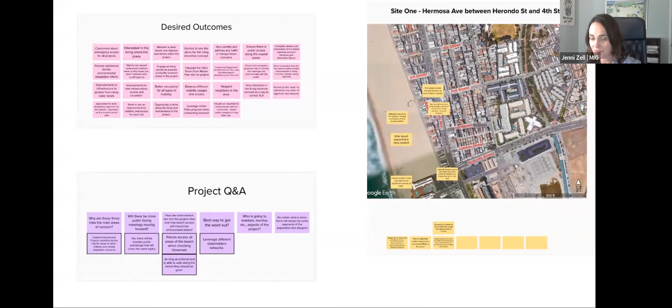So we have had 2 community workshops so far. We've had 6 official stakeholder meetings, and we've also spoken with some of you in person out on site. You have a beautiful beach at Hermosa. It's been actually a fun project too, just to get to walk and check out your place.

And this is some of the feedback we've received in some of our different meetings. It's pretty detailed. And also, in addition to getting your feedback, we have analyzed data, we have modeled hydrology, hydraulics, we have Moffatt & Nichol, coastal engineers who are on our team as well. And we also have CRC, coastal restoration consultants that are biologists, ecologists. We've got myself, I'm a landscape architect. We have civil engineers. We've got a great team looking at this from a lot of different angles.

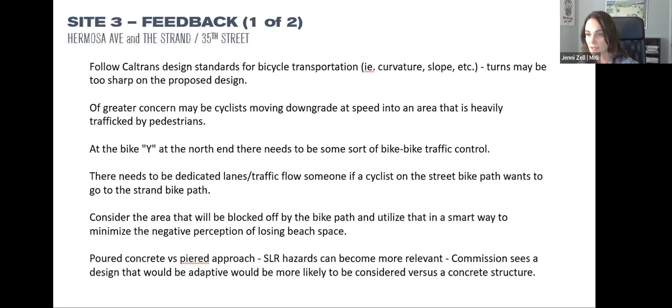And so we've looked at current conditions, projected sea level rise scenarios. We've calculated areas, and like Andy was saying, we've made renderings and graphics to kind of represent some ideas here that we'll be looking at. And so we've heard and recorded a lot of your preferences for proposed design options, your concerns, your desired outcomes, and your priorities for people who live within the community, and that any of these eventual changes or improvements will eventually impact you.

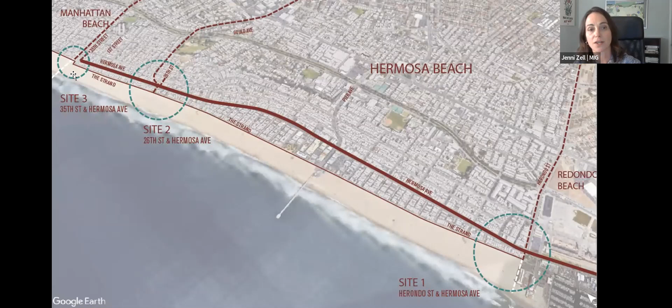For some of you this might be a repeat, but I want to remind us where we've been. This project is a conceptual design for a suite of green infrastructure projects and sea level rise resiliency improvements, to be incorporated into planning and mobility enhancements along Hermosa and the Strand at three locations: Herondo and Hermosa to 4th Street, 26th, and 35th at Hermosa Avenue.

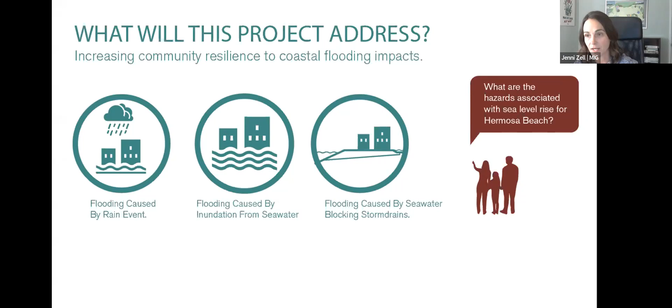These are the project's overarching goals. In previous public meetings, which are available on the city website, we walked through what the hazards are associated with climate change and how that's relevant to us here in Hermosa Beach. We dug into that a lot deeper in public meeting number 1.

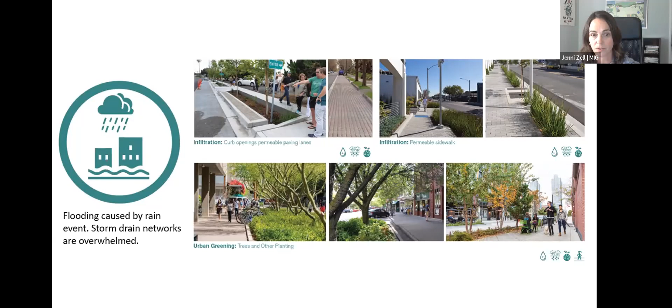We also looked at potential flooding measures for flood inundation caused by rain events when the storm drain gets backed up, and what we can do to address that. What about flooding from seawater driven by storm events? We'll look at that more in depth later. And other options caused by seawater blocking the storm drains.

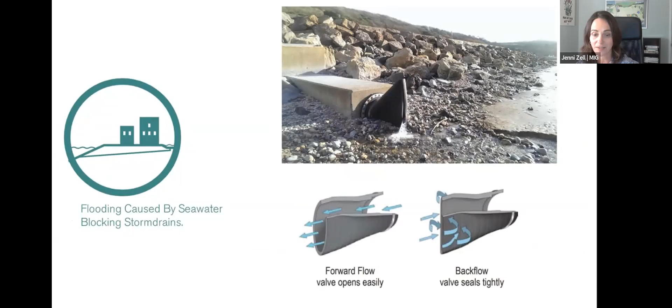Some of these solutions are technical and some of them are biological and a little more natural. This is representative of some of that study and what we're looking at.

What we've modeled is the Coastal Storm Modeling System, CoSMoS version 3.0, phase 2. It's a great online tool developed by USGS. We've also looked at Mike Urban and Mike Flood, which separately give flood determinations for node floods. We can get more into that in the reports later if you're interested.

We looked at various scenarios based on existing conditions: 3.3 feet of sea level rise, 6.7, even 16.4. What I want to note, which is really key, is that even the 6.7 foot of sea level rise is not imminent—there's a 1 in 200 chance of this happening by 2100. So that's just a reference point, but that's the scope of this project, to look at these different scenarios.

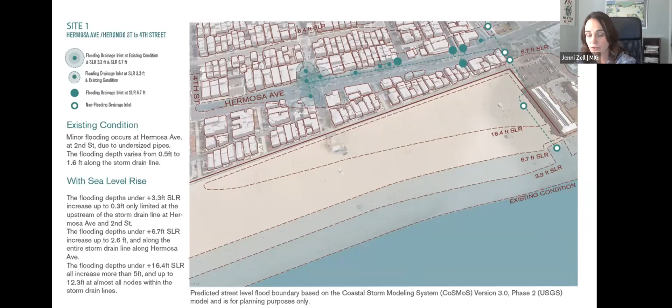Really, this site, site 1, is the poorest draining area of the study, and sea level rise compounds the flooding issues in this area. What this tool helps us do is look out long term and figure out how to combine infrastructure improvements with resiliency here.

We've explored two options so far. We're calling these options, but there's many deviations or iterations that can happen. We heard back from the community that we really need to show an option that keeps traffic and street flow as it is today while still addressing the flood concerns for this area. This is along Hermosa Avenue.

It's from Herondo to 4th Street. This option keeps the existing sidewalks and the two lanes of north and southbound traffic in place, and adds stormwater management in locations where we found opportunities—biofiltration planters located in existing parkways where there's no drive apron. We also found areas for new permeable paving and parking spaces that can add stormwater value in bioretention, to add to the bioretention filters.

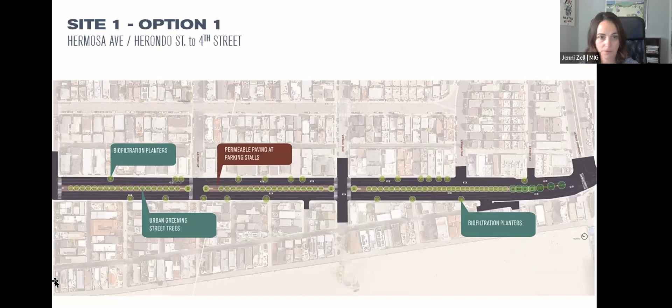This is what it looks like enlarged, one section of it. In the entire area, this option gives us a little over 2,000 square feet of bioretention planting, plus 23,000 square feet of permeable paving, and could add 98 new street trees.

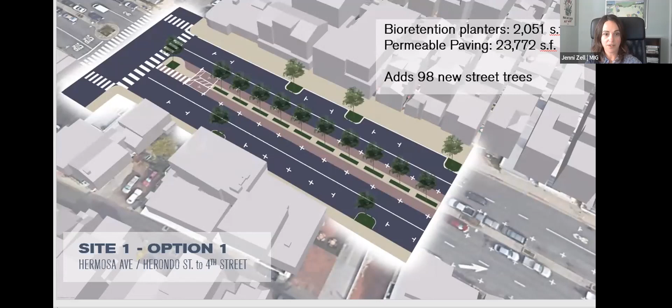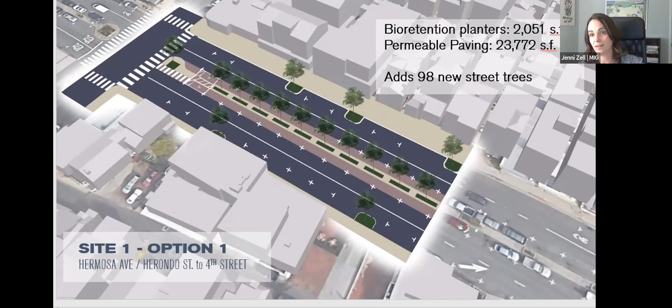To give a reference point: at a 10-year model, which is what we modeled for the storm drain, that gives us a flooding volume of about 42,000 gallons. The good news is that even with this lighter touch, keeping the street in place, just the bioretention planters get us about half of what we need to absorb that volume for the 10-year storm. When we add permeable pavers, we're right at that volume calculation for the 10-year storm.

Let me go back, give me a second.

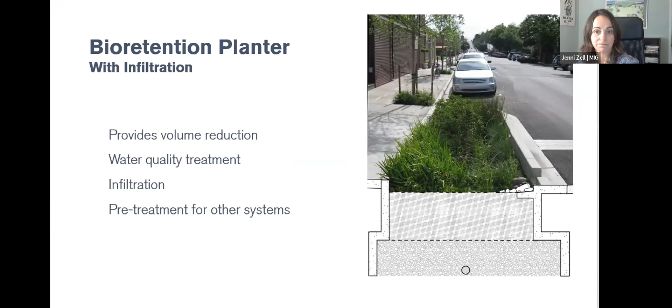So what those biofiltration planters look like, they're going to look something like this. I'm sure you've seen them on streets all around in different communities.

The other option, permeable paving. This provides volume reduction and infiltration. It has some constraints: they've got to be located 10 feet from buildings, and the volume reduction is limited.

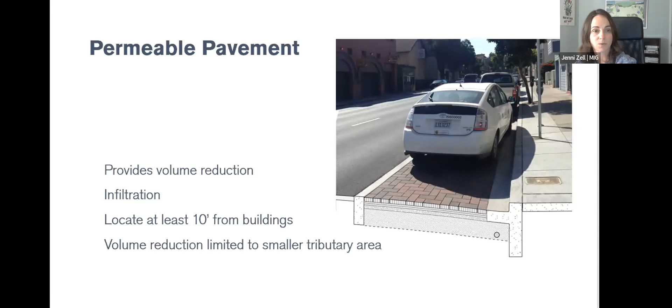These can be combined with other options like tree canopies, which we showed, to help just reduce overall stormwater volumes. So this option, option 2, really addresses mobility concerns and combines that with increasing storm volume capacity reduction.

Tying back to the goals of increasing mobility, this option adds a two-way divided bikeway connecting Redondo north up to Manhattan Beach. It increases pedestrian safety by reducing crossing lengths, and it also has angled parking.

We know that got pretty controversial in our last meeting. Some people love it, some people hate it. But what that does is it keeps the existing parking counts, which is so important to keep people and their parking and access to the beach and to local businesses.

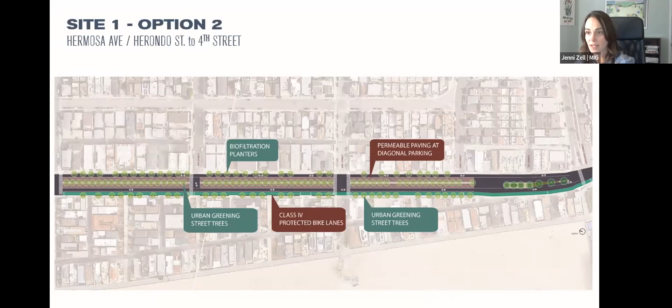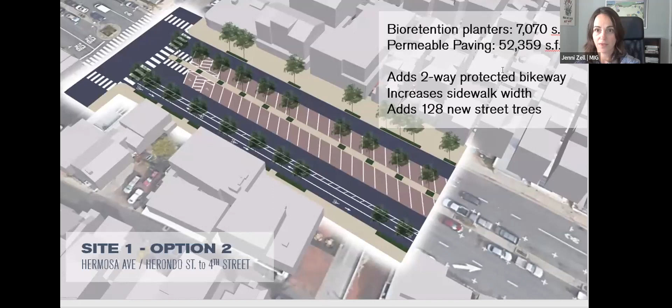And it increases the flooding mitigation for those increased levels of storm flood, like a combination of sea level rise and increased storm volumes. So those numbers are of course larger. This is about 3.5 times the volume in the bioretention planter compared to the previous option, and about 2 times the volume in the permeable paving.

The other added benefits here, and this is something we heard from the community, is ADA accessibility and improved sidewalks. So this adds a 10-foot sidewalk and other environmental benefits with trees and some vegetation to add water quality benefits as well.

All right, Andy. Okay, thank you, Jenni. So this is a point we want to pause and respond to, hear your thoughts and considerations that, again, with these being concepts, these are kind of options for this site. What else would you suggest are additional considerations or concerns or benefits that you see from these options might offer the community? Happy to answer any further questions.

I see a couple questions in the chat related to this, so Jenni, we'll need your help here. First of all, will the ground be able to absorb all that water during a storm, or will it be saturated given a high water table? Maybe you could briefly say between those two options as examples how much they relatively absorb depending upon the storm event.

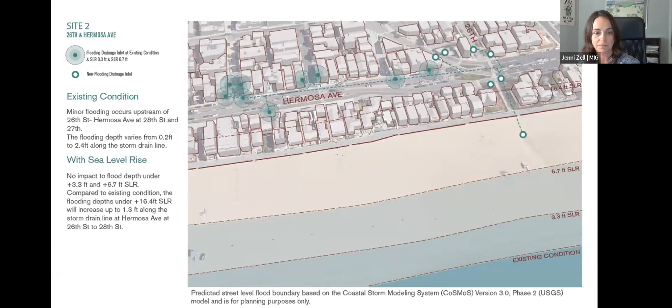In addition to biofiltration and permeable pavers, other options for 26 include bioretention basins. They take up more space than we have at the Herondo 4th section, site 1, and they provide volume reduction, water quality treatment, infiltration, and extra habitat and environmental quality benefits.

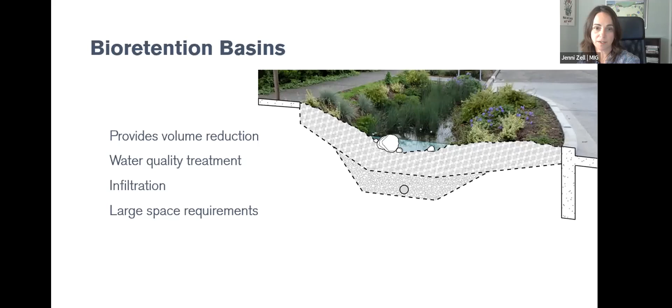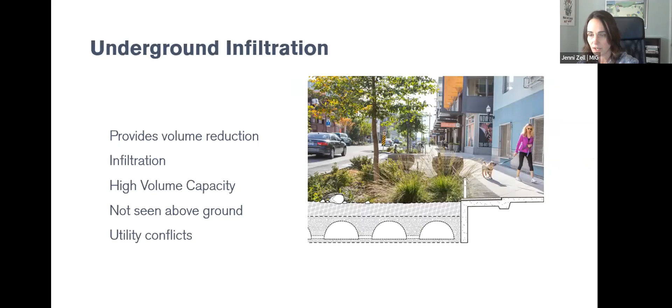Also, where there are not underground utility conflicts, there's possibility up at 26 for underground infiltration. These would need to be explored in more detail. Those are the options.

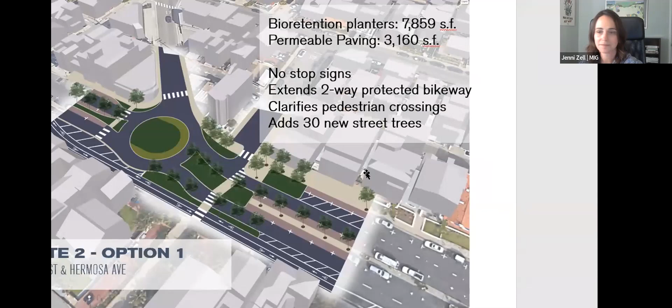At site 2, we got a roundabout as one option. The benefit here is it provides for a continuous two-way bikeway. It connects this section, which dies away, and provides a continuous bikeway, and also green areas for potential stormwater treatment areas.

It may require half or full closure of 26th Street. That's shown right here - we're showing it currently at a half closure.

For the 10-year storm that's modeled, the flooding shown in the previous slide is up to about 79,000 gallons. With bioretention planters in this area, we can get somewhere around 88,000 gallons, so with just the bioretention planters we've kind of met that 10-year storm requirement. With permeable paving, we add another 6,000 in volume reduction.

Combining bioretention with permeable paver, we get closer - about 70% of a scenario we wouldn't see until 16.4 feet of sea level rise.

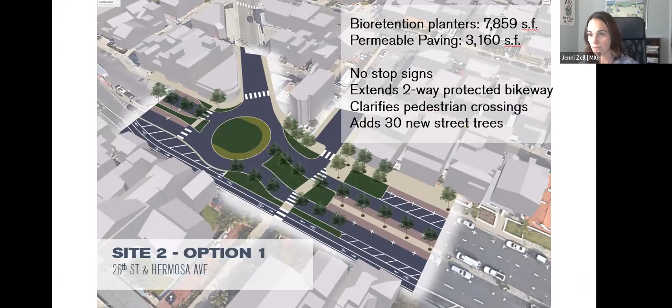Some of these light green areas in front of the businesses - we did hear feedback that providing bike racks and similar amenities would be great to have here. So these could be thought of more as mini plazas.

What this gets us - these numbers are actually very similar to Option 1. We're almost at that 10-year goal even with just the bioretention planters, in this larger area. But in this option, you probably need the bioretention with permeable paving to get the flood reduction in that 10-year scenario, and we're at about 60% for that, far off the 16.4 foot sea level rise scenario.

Let's move on to additional considerations, Andy.

Yep, absolutely. I appreciate seeing some of the comments and questions coming in, which is great - Jenny, thank you for that. A couple things I wanted to react to - Jay, thank you for your initial thoughts as well, regarding the flow and the bike lanes going northbound, heading into traffic.

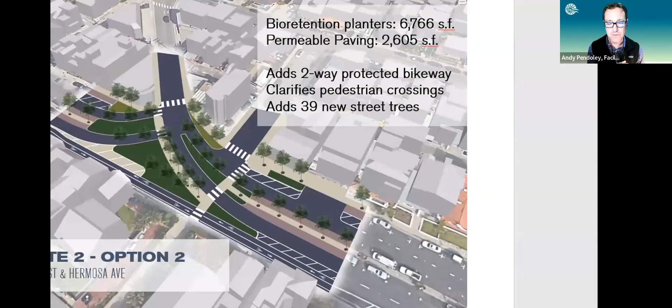So thank you for that question. And then Jenny, I want you to please clarify any of that if I misspoke, but also if you can help answer the question - if you can put option 2 back up and answer how does one turn right from Hermosa Avenue in this scenario? Turn right from Hermosa heading north?

I'm sorry, maybe you can just kind of point to those. Turn right, heading south, sorry, if you're heading south. Thank you, Jay, for clarifying in the chat. So if you're heading south on Hermosa, how do you turn right? This is the right-hand turn. Okay, so it kind of turns into a T intersection there.

That would either maybe be a stoplight or stop sign, not sure yet at this concept level. No stoplight, no stoplight, stop signs. Maybe, yeah, stop signs. Traffic circle, no stop signs. This, yes, there will be stop signs.

So yeah, absolutely, Jay, into your further reflection there, yeah, maybe it's a little tight. And again, more closely, the initial conceptual work from the design team suggests this is probably workable. Again, more close analysis, design, engineering would need to put that to the test to confirm more specifically. So I wanted to make sure everybody knows that more closer work would need to be done.

And I'll add too, we did have a study here that would have required a traffic light because of the crossing, the size of the crossing required, and we heard loud and clear, nobody wants that. So that was removed. And I will add, again, you're right, there hasn't been an official traffic study. There was a traffic study that was done during COVID.

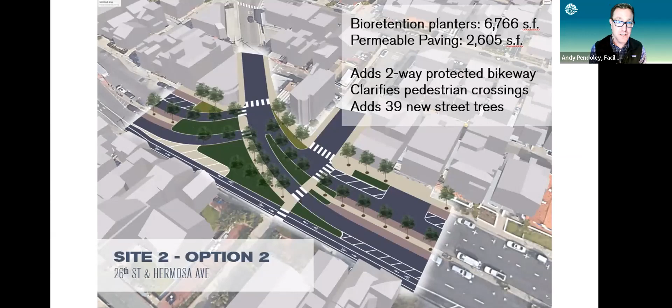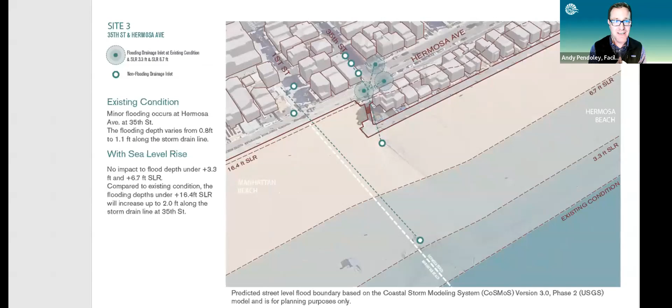Let's go ahead and keep moving over to site 3, and we'll be happy to circle back if anybody thinks of something else at this site later. So Jenny, if you can spend a few minutes talking about site 3 - I know you've got a fair bit to show here, so this might be a little longer segment, right? Yeah, but still plenty of time afterwards to have discussion with participants. So go for it, yeah.

So site 3 is right here, right at Hermosa and 35th, essentially. And what we found in our modeling is demonstrated here - beach narrowing in different scenarios of sea level rise, and also a small amount of flooding that's happening at these nodes up here. And I think it's interesting to note too, for flooding at this, that it's not increased at the 3.3 and the 6.7 level of sea level rise. So it's just, we didn't know that going into it.

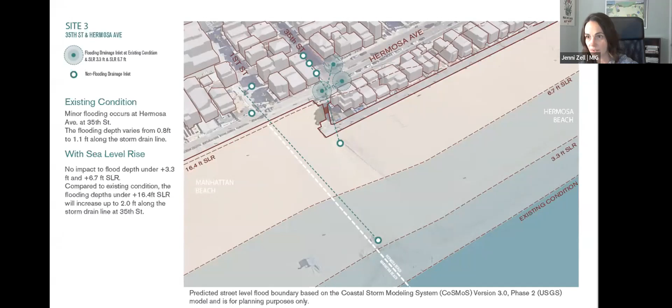What we're looking at and what our design proposal is focused primarily on is a condition that the outfall poses, because the existing outfall structure here, in a storm situation, could allow flooding on the homes and infrastructure behind this beach elevation.

We've looked at, in the past, a couple different options for a living shoreline or a dune, and this has morphed and changed over the past couple of months. We've heard pretty favorably in support of building a living shoreline here, and there's a couple of moves that need to happen to make this work.

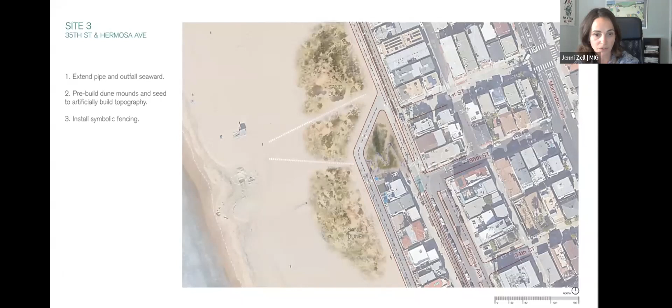This is where it looks like now the outfall is essentially right there, and this is what it might look like with both the sand dune and outfall extended. This is about a 70 to 80 foot dune, and we still have about 175, 180 feet of what we call towel space preserved here in this option.

This option also shows a connection from the strand up north, which we'll look at in a couple more views later. We can go back to it during discussion if you want to look at what these visualizations are showing.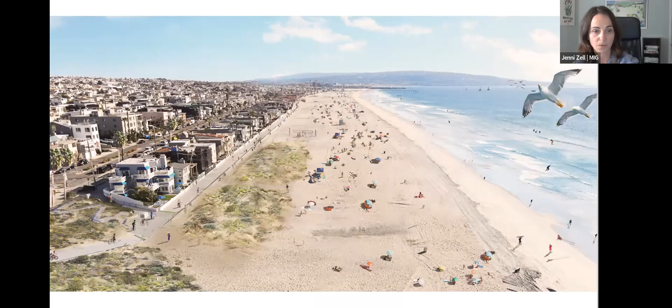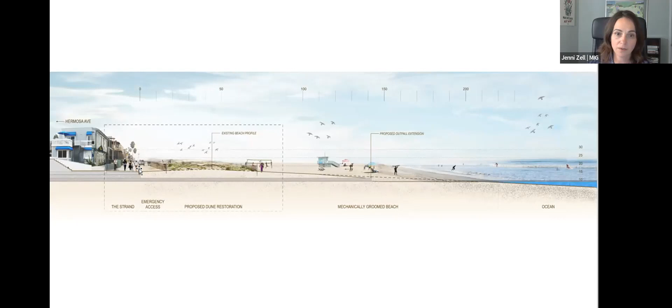This allows a beach profile shown at approximately 2.5 to 3.5 feet of added beach profile, and what that can help prevent in the storms we've modeled is this seawater reaching into the strand. This is an enlargement that gives you a closer look at what that might look like.

We heard from the lifeguards that this is essential to have beach access and emergency access, and also if in a high tide event the beach seaward was removed, you'd still have access at this area here.

Jenni, sorry, real briefly, while the image is up—the planted dunes, what relative height would they be as proposed here compared to what's there now? How much higher are you going? Yeah, 2.5 to 3.5 feet from what's existing today. So existing beach profile, and then the dune, that dash line there. And that height would build up over time.

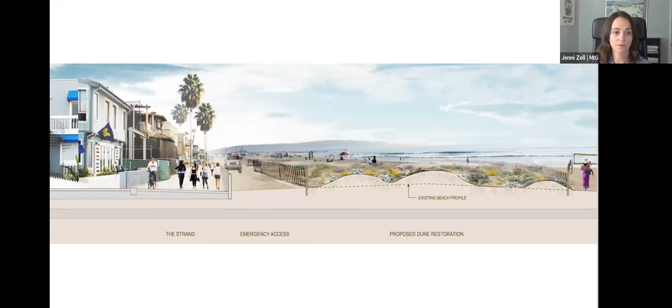The really cool thing about dunes is that it provides a natural measure of protection from sea level rise adaptation. Because what those plants do is they trap that windblown sand that ends up going onto the strand. It traps that windblown sand, and those dunes grow in mass to protect and trap the sand.

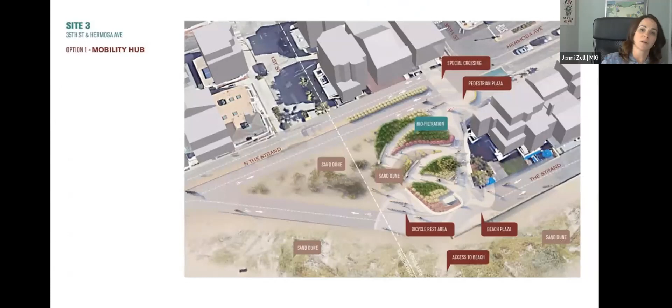So this option, this is a couple of options we have here for how we connect to the strand, and how we help avoid pedestrian and bicycle collisions in this very highly used and loved area. What we show here is an extension of the strand, a 20-foot link, where bicycle traffic moves north towards Manhattan Beach, and pedestrian traffic moves either up stairs or along this ramped section.

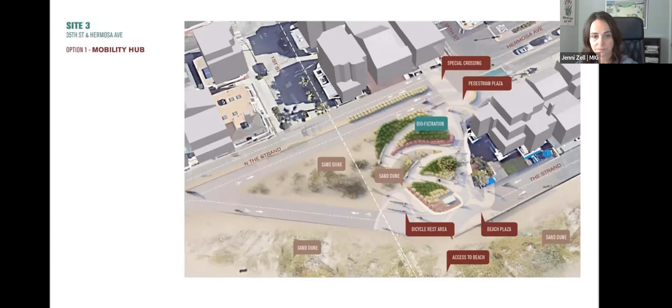This option we're showing is more of a mobility hub. It provides an area for bikes, a place to stop and rest on your journey, a nice experience of walking up the stairs, and it creates more of a plaza-like experience here. This is some of the planting you might see in that plaza, some ornamental planting.

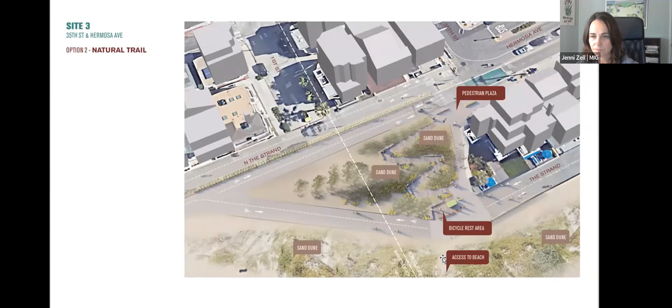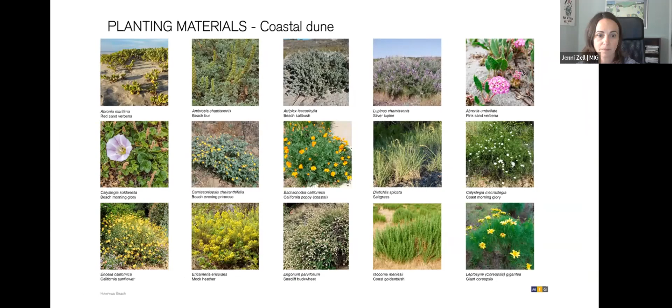We have another option here, option 2. This is a little bit more subdued, more of a natural trail and dune approach, where you take some of this plant material that would be stabilizing those dunes, pull it across here, and create added habitat value, while also having an ADA accessible route up to this area. Again, separate traffic from bicycle circulation, with planting material on both sides of the strand being more contiguous, establishing coastal dune plant material.

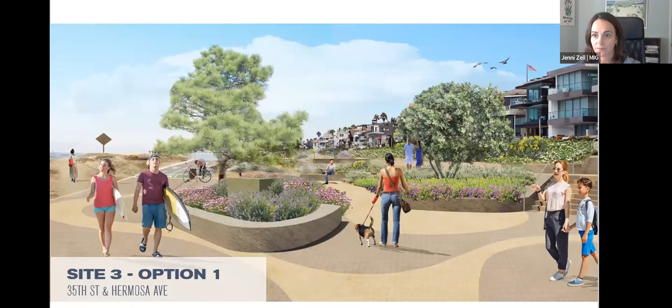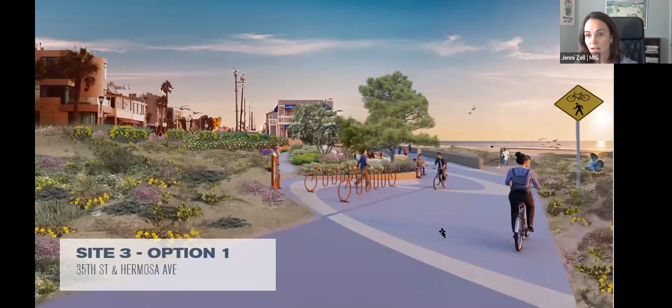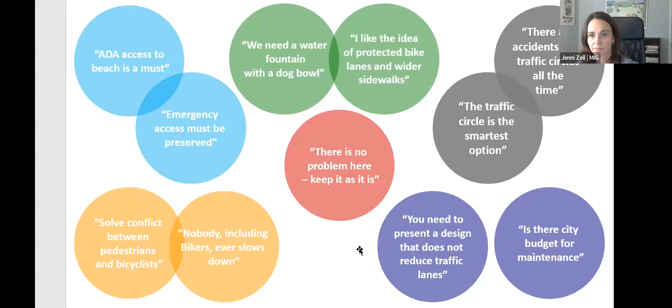And so, again, we've gotten a lot of feedback here. Can you go back to that, Jenny? Sorry, you kind of, just wanted to quickly have that, and I'd be happy to.

I just want to acknowledge, I'm really glad you added this, Jenny. We've had a lot of really interesting feedback so far, and I'm already seeing more tonight and excited to hear more, about access, about making sure this is improving access for people of all abilities, but also for emergency access as well. And a lot of interest for different recreation needs, whether you're bringing a dog, on two wheels, a skateboard, on feet, or other mobility assistance devices, being thoughtful about how all those uses can be in this space together and have the access it needs. Again, the safest conditions possible. So, just wanted to acknowledge that overall, and that we have to balance that with broader mobility needs in the area as well.

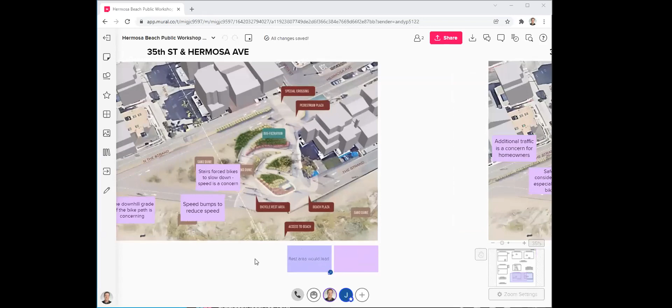And then, I'm all for some kind of accessibility ramp for ADA, that's fine and everything. But again, just emphasizing what Ann said about having that whole plaza right there—I mean, honestly guys, it's just not going to work in this area. There's no way, it can't.

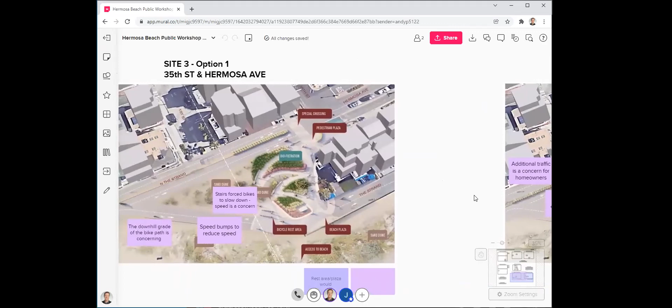That's all I have to say. I appreciate all your efforts and everything, but there's got to be some other solution.

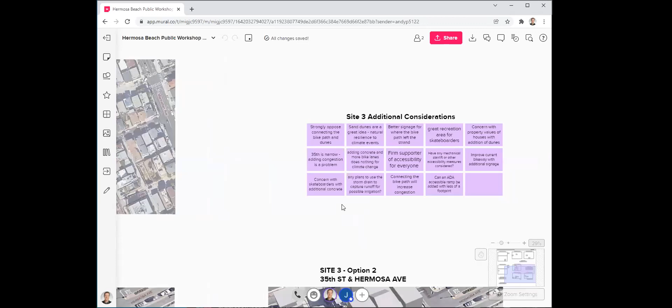The other thing I was going to mention is that drainage that's there right now that pools up over the years. I believe that's there so it captures all the dirty, polluted water that comes out of that drain and it soaks into the sand. That's why it's so discolored, but it prevents it from going out into the ocean. Now granted, it'd be great to have a pipe going directly out to the ocean because it would make a better surf break for me and my friends. But...

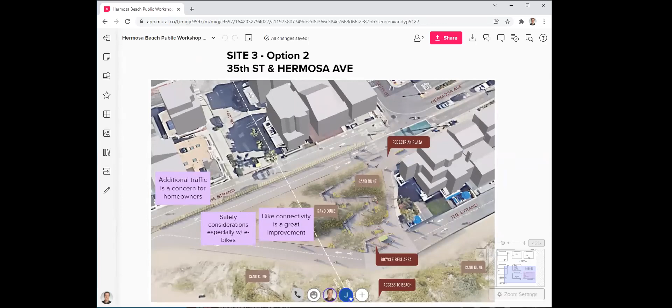It seems to me like the beach crews keep that managed very well. They're out there working on it and keeping it going. So I don't know if all this is really necessary. But thank you very much for my time.

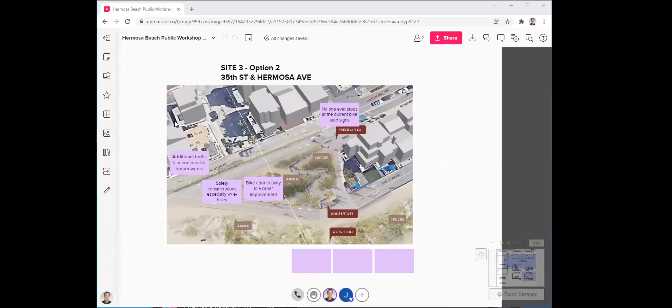In general, as far as all of these sites go, I don't favor any decrease in traffic lanes. I understand cars may be going out, but not in a long time. So I'm against that, particularly at that site too, where there used to be a spot planned with backward parking. I'm not sure if that's still the case, but if it is, I'm against that. At least when you're backing out in the normal way, you can creep slowly out, allowing for any traffic to recognize your maneuver and stop with enough space to let you move out and then proceed down the road.

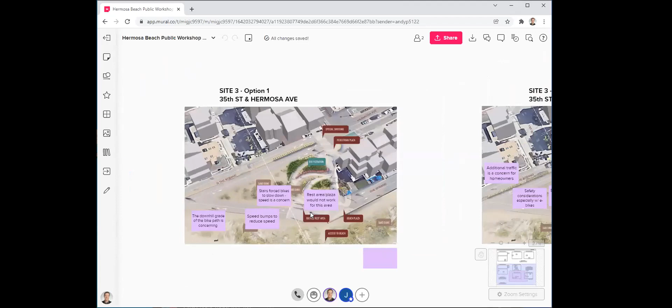I also don't feel that the impacts of removing the retaining walls along the existing stairway at the 35th site, and the construction of 1 or maybe 2 new ramps with benches at this north end, has been given appropriate consideration. In many of the comments - I'm just done a second, I guess. Okay, this is the highest elevation along the Hermosa Strand, and lowering the elevation of the beach here is not going to improve the city's ability to meet the challenge of sea level rise and more severe weather events.

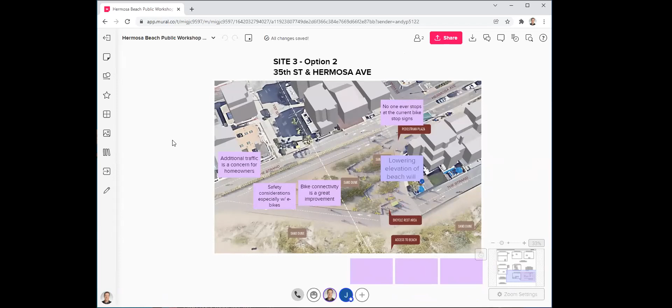I personally have never seen any flooding happen at any of those drains that were circled or colored on one of the previous slides. There is some water down there next to 3500 right now, but that's because the sprinklers overwater the two planters.

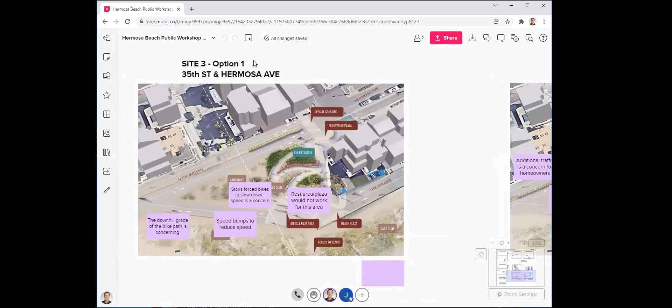As far as ramps go, whether they're ADA compliant or not, in order to join those two levels - if the bike path is constructed, as mentioned before, that's only going to increase the amount and speed of traffic along the lower strand. I also think opening up that end will allow more of the northwest winds to blow in and down the lower strand and get into all the fronts of the houses.

Okay, alright. You know, meeting the standards for an ADA compliant ramp requires considerable new pavement and extensive new railings. The ramp itself has to be level, which is another complication.

All right, I'm almost done. Although the north end of Hermosa is an unusual corner, and the whole northern border of Hermosa is a bit of a hoot, really this is just another bit of residential strip along the strand. The renderings show benches up on top, and then the pedestrian plaza up at the top, that actually opens up onto a garage and three house entranceways as two of the four borders for that plaza. And as mentioned previously, encouraging further loitering, especially at night, is something I really oppose. I suppose I've talked long enough, so I'll let Richard go.

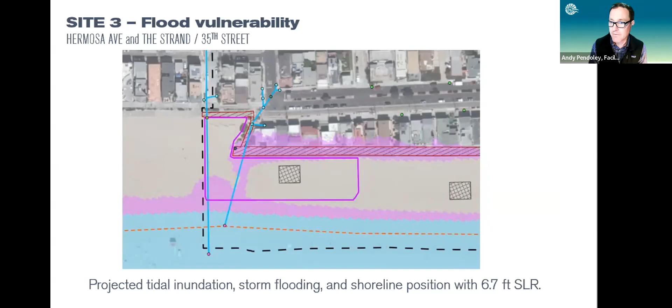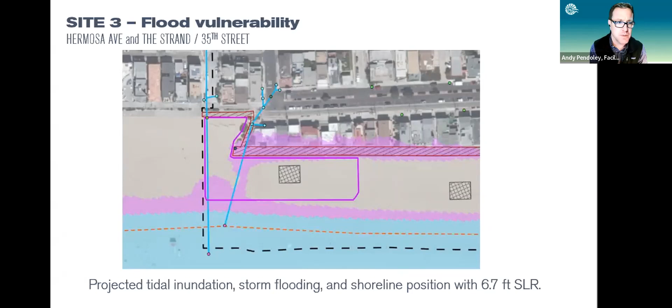And in the conversations we've had with the community and agency stakeholders, that's gotten us to what we've proposed so far. And that's what we want to hear back from you on—additional factors that haven't been considered, that you want included in the decision-making factors. I think we've heard that, we're recording them now.

And I do want to reiterate that the next step involved here is a cost-benefit analysis. We are looking at the costs of implementation and how that compares to flood risk. We have an economist on our team looking at certain things, including beach day loss and recreation loss due to flooding and beach erosion, and that'll be included in this final report and these recommendations.

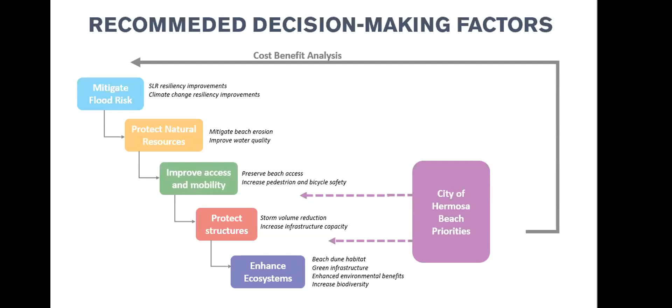Appreciate it, and it's another good example of, for any potential measures to address a challenge, whether it's mobility, flooding, or whatever else in your community, thinking about how we can take opportunities to make other improvements that are a good fit, things like lighting for example.

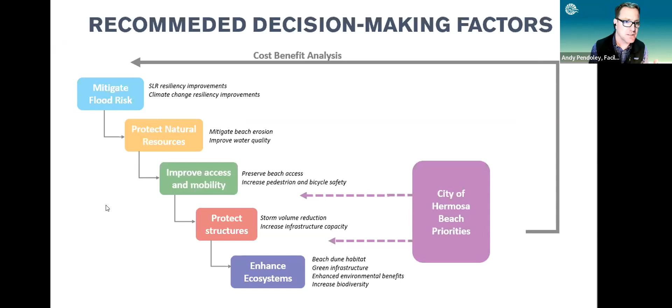Good, I think with that, I want to come to, Jenny, I think our next slide, because we're getting close to wrapping up here. I want to respect everybody's time. We did, I think as you probably saw advertised it. Jenny, can you go to the next slide, please? We wanted to make sure we talked about next steps and you're clear about that. So Jenny, can you kind of tee this up and talk a little bit more about what's coming still?

Sure. The cost benefit report, the funding source report, what types of funding is out there, what can we leverage outside of the local funding, and a final report at the end of February is what will be produced here.

Okay, thank you. And I do want to clarify, because I've seen a couple questions tonight, and we've been mentioning over and over, this has kind of been a study. It's not about, there won't be the final report... And Doug, I appreciate if you come back and help clarify. I want to make sure we state it clearly and unequivocally, but the final report will not be a specific recommendation to City Council to fund and build any of these specific improvements right now at all. If anything, the outcomes of this report would be the council considering further, deeper study on some of these options potentially. Is that right, Doug? Just so we're clear about what the report does and doesn't do. Yeah, absolutely, Andy. I mean, that's perfectly stated. Again, these are based on projects that were already on the books.